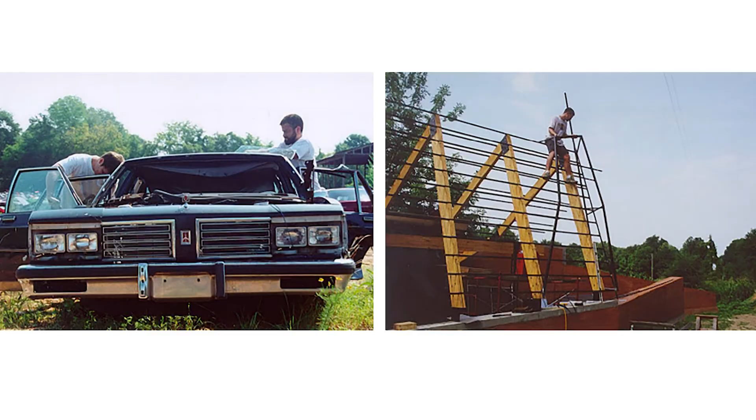So me and a few other students designed this community center for a small community, Mason's Bend in Hale County, Alabama. It was a tight budget. Like most student projects, all of our labor was free, but the materials had to be donated or sourced in a resourceful way.

We used rammed earth, the cypress beams there - we actually cut the trees down and milled them ourselves. The steel was donated, and most notably, we pulled the side windows out of late 80s sedans because they had the perfect holes for flipping them over and attaching to the steel.

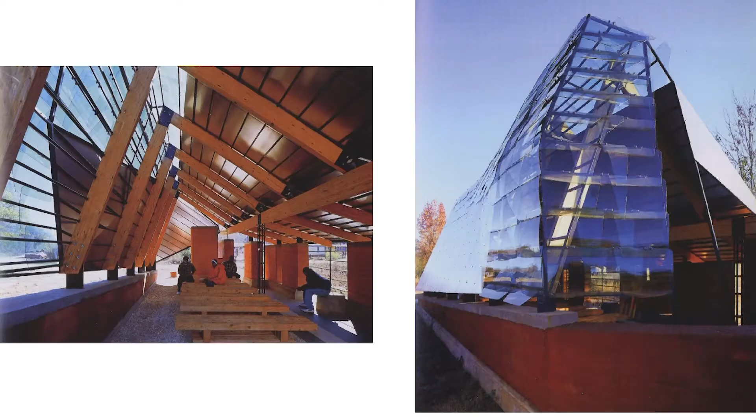What resulted was a community center that could fit 150 people, but was also just a comfortable place to hang out with your friends and grab a smoke, or just get in out of the rain, or whatever.

This time at the Rural Studio reinforced in me that I think through my ideas better in physical space. So whether I'm sketching or building a study model or creating a full-scale mock-up of some idea we've come up with, I tend to think through my hands.

So we've always kept a space for making. Early on, when we were living here, that was a couple sawhorses and some secondhand tools from the flea market. Now it's roughly a 2,000 square foot shop with a full woodworking area, a full steel area, and now I'm sharing shop space with a blacksmith, so we even have a forge and a few other things to play around with. We're constantly working through our ideas like this.

While we both embrace the maker's ethic of creation, we use our differences to hone these ideas that become solutions. For us, iteration and debate of a design problem from different sides allows us to explore new ideas and notions that we might not have arrived at otherwise.

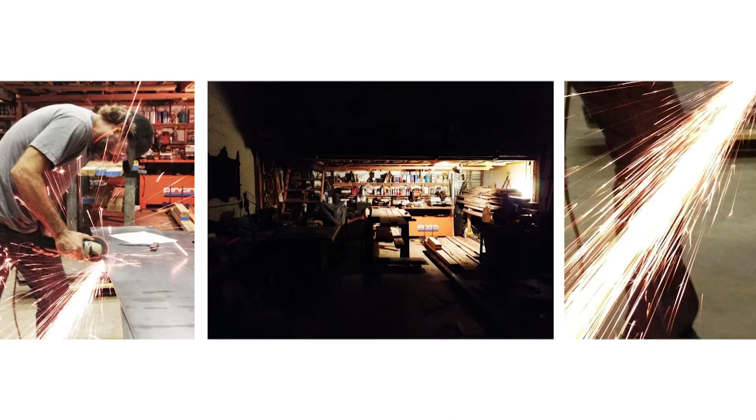Dale is the practical craftsman, finding beauty in the simple functionalism of the idea. And I tend to approach the design process as more of an abstract emotional thinker, looking for the aesthetic solution.

For me, over the years of sewing, I've found that there are many similarities between architecture and sewing, and I think these habits we've established as part of our practice apply in this context as well. My body is the site, and I work through constraints of materials and craft. In each case, the context is unique and site-specific. In this case, it was a problem to solve about using a minimal amount of fabric and seams to create a space for one.

While our approach and even our tools differ, the function and goals behind the tools we use are the same.

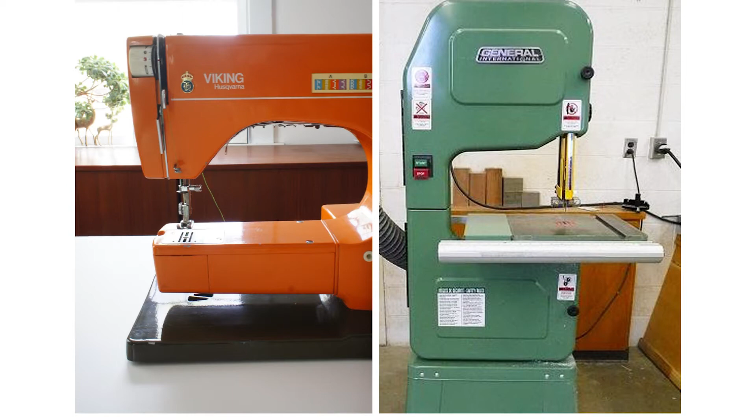Every project is an opportunity to create something meaningful. Regardless of scale, whether it's a sewing project or a sculpture or jewelry, we try to apply the same habits to the project at all levels.

Early on, we were working for other people, and we had all these pent-up creative ideas that we wanted an outlet for. Every birthday present for a friend, or a Christmas present, or a need for a coffee table or a shelf became an opportunity for us to design something. And every design opportunity became an opportunity to make something.

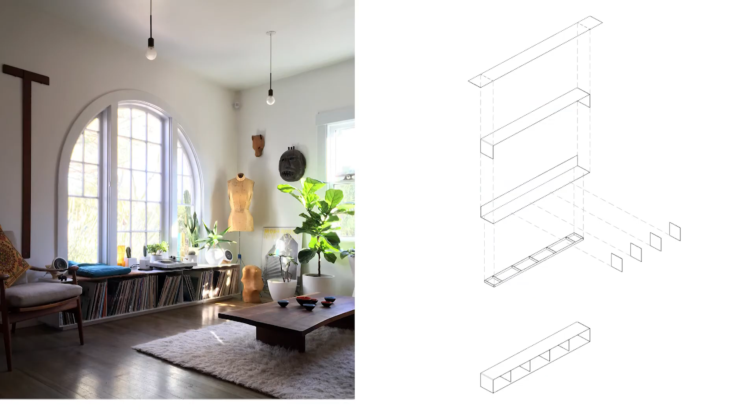That powder coating endeavor turned into another opportunity for our home, where we wanted a powder coated steel record shelf, and also wanted to incorporate a dog perch for our dog. We used bent plate for the top, and plate steel dividers to help organize the contents. This was also a study of efficiency, since we were able to fabricate all the parts out of a single 5x10 sheet.

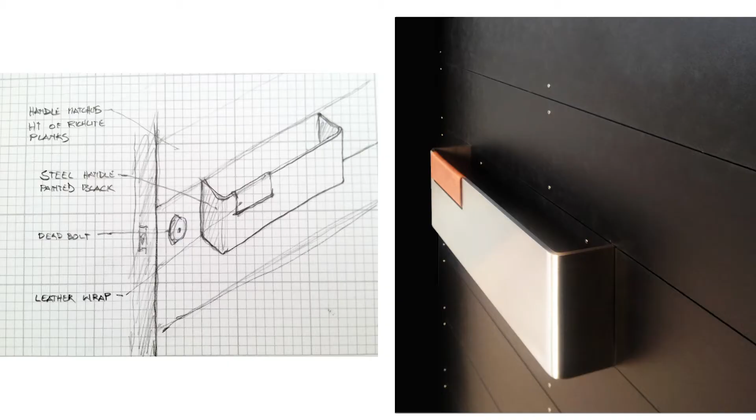The bent plate led to other ideas, like this handle - simple bent stainless steel wrapped in leather right where you grasp it, just to offer a little comfort as you grab the hard steel.

The land was an art site that would host exhibits by other land-based artists, but all the exhibits were temporary, and they wanted one permanent place for this. That meant we had to build it without making scars upon the land, so we used the cattle tracks. We would have wheelbarrows with all our tools, and follow the cattle track up the hill instead of making our own trail - using the scars that were already there for moving materials.

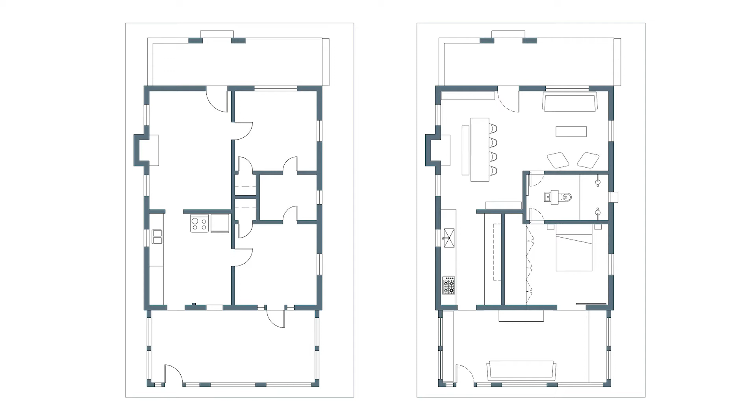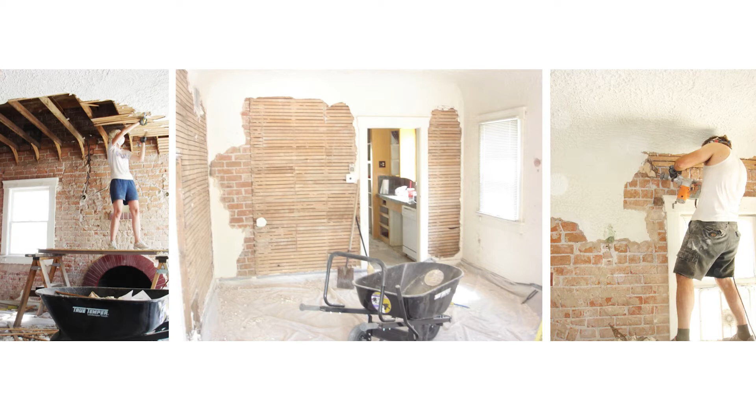And this was us. In 2 weeks, we demoed and just ripped it all apart. And then it took us 4 or 5 years to put it all back together.

I mean, because again, we were still working for other firms at the time, so this was sort of a weekend and evening project. And it was also a really huge learning experience for me because I'd never been through this process before. I think it's one thing to go to site visits and see what's happening. It's another experience when it's your own house and you really just gutted it.

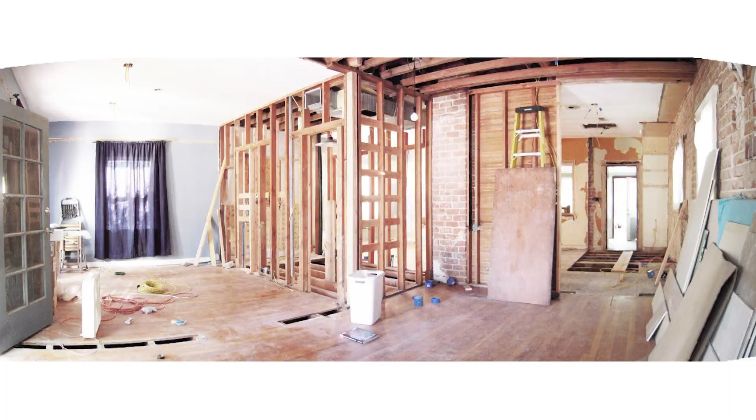But one thing we noticed was that when we started opening up the walls and the ceilings to replace all the electrical, we were really drawn to the beauty of the lath that was on the walls. And we were amassing these huge piles of it, and we started wondering if there was a way that we could reuse it. We felt ashamed to throw away so much beautiful wood, so it ends up being reused.

So here you can see this is just another in-process photo. Over here on the left is looking at what used to be one of the front bedrooms. Sort of in the middle of the space is the bathroom shell, and then looking down through the kitchen into the old addition.

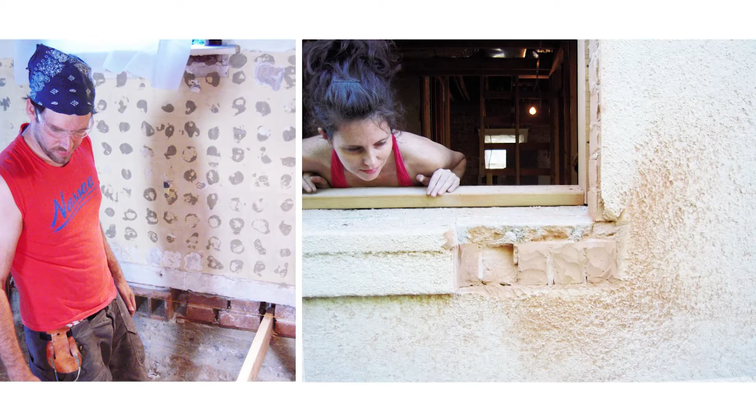I don't know what to say here. I didn't want this in here. Dale doesn't like that this slides in here, but these are just photos of us working, and I think that there were many moments during this process where we really felt kind of overwhelmed. I always joke that what we were actually doing here was sort of these moments of silence, wondering what we had gotten ourselves into.

But, you know, as Dale said, the house came apart really fast, and it was just putting it back together that really took a long time for us. But part of that was also because we would iterate ideas, and we were experimenting on our own home in a lot of ways.

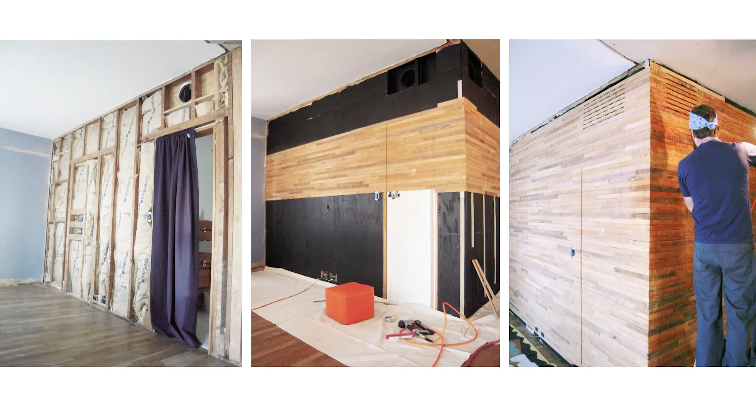Sometimes by reusing materials, but then also we changed out all the windows - they were single pane glass, and we put insulated glass in all the existing sashes, which means everything got heavier and you needed to increase the weight, but the weights wouldn't fit within the window weight area in the sashes or in the frames. So we ended up having to cast our own weights with lead because it's heavier and takes up less space.

So we were smelting lead in a cast iron skillet on a turkey fryer outside, pouring it into a form we had made with some steel pipe, with barely any safety gear probably. But those were the fun moments.

So as you can see here, this is the process of us reusing the lath. What we decided to do is clad the bathroom volume with the lath. We were also testing ideas about how to integrate a door into the lath, coursing it out as it moved across the door, and up in the top corner we routed out small slots for the supply. This is the HVAC supply, and when we brought the lath up, we just cut little slots, and that became an integrated grill.

And here it is today.

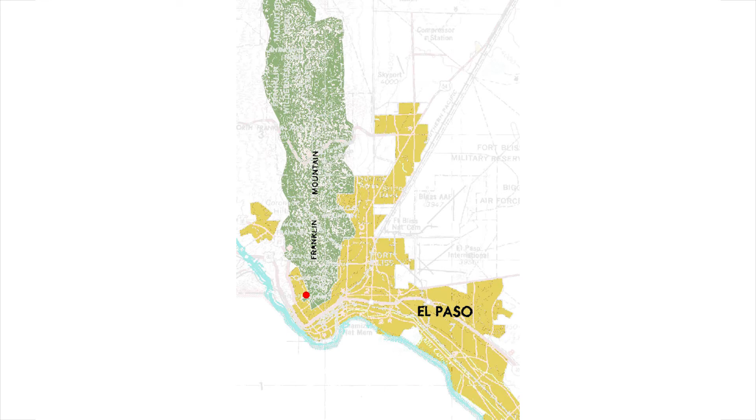So Jeremy and Heather had this site here, the red dot is, perched right at that border between the urban city and the Franklin Mountains. They had a site right at the top of this development, new development that was happening. They had the top site, and this is all state park land to the south and to the east. So there was always going to be protected views to the south in the city and views up to the peaks of the mountain.

The site was steep, probably about a 25% slope, populated with lechuguilla, ocotillo, and these beautiful weathered gray stones.

So we decided to push ourselves as far to the south as we can in order to push away from the northern neighbors and maybe offer a bit of privacy, but also to push right up against this canyon edge would sort of make it feel like you're right on the precipice before falling down in.

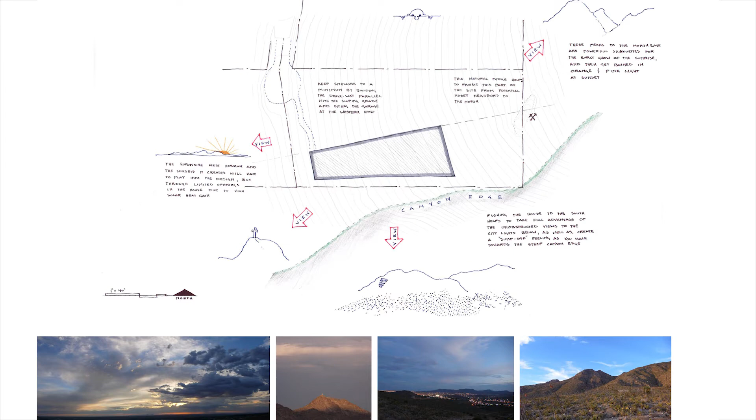Kind of at an oblique angle is Mount Cristo Rey. It became an important thing. So the sunrise comes up and over the Franklin Mountains, and Mount Cristo Rey is the first thing to get kissed by the sun. And someone put the little cross up there. So capturing that view from some moment in the house was important to Jeremy because he wanted to sit down, have his coffee, and just start his day that way every morning.

Oh, sorry, this is still me. I just want to make sure. I'm realizing that my phone might be going.

Sorry. So this is the site. You can see the contours are super tight, 25% grade. The cul-de-sac was already there.

We decided to come in as low as we can to try to minimize our impact on the land, similar to the deck project that we started with. So you come in with your car, pull into the garage mass down low. The living mass would be a story up above that and would open out onto the southern edge.

You can kind of see the fold in the contours here, that was the beginnings of that canyon wall. And then as you come up to the bedroom mass, it's kind of a floating box, and the bedrooms would be here with the master opening up into this terraced garden.

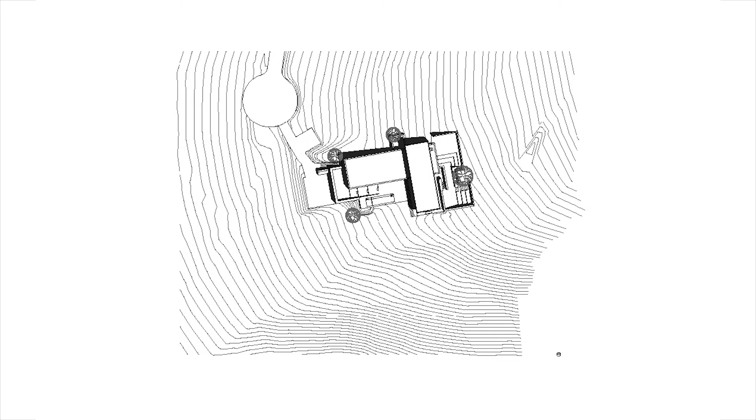And the site was so steep coming down here that we wanted to slow that flow of water that's going to be screaming down the hill, but also create a moment of a manicured garden to juxtapose against the wild nature of the slope.

So we'll just walk through this kind of quick. The owners would come in here to the garage, then they would come into the mudroom, ascend a set of stairs that would bring them into the backside of the kitchen, and this became like a pantry area. And then the kitchen and the dining room open up onto the pool patio, and as you walk back into the family room, you end up below grade.

One of the things we haven't touched on is that the northern side is where your neighbors were going to be. Usually we want to try to capture as much northern light as we can, but we also wanted to maintain some privacy. So the only opening on the northern side is this huge window from the office space, but it's protected because there's this courtyard. It's actually sort of below grade, so there's this courtyard that opens up off of the office. It allows light to come in without imposing on the privacy area.

And then you ascend the stairs, and you are in the bedroom wing with the kids' bedrooms down at one end and the master bedroom here opening up onto the terraces.

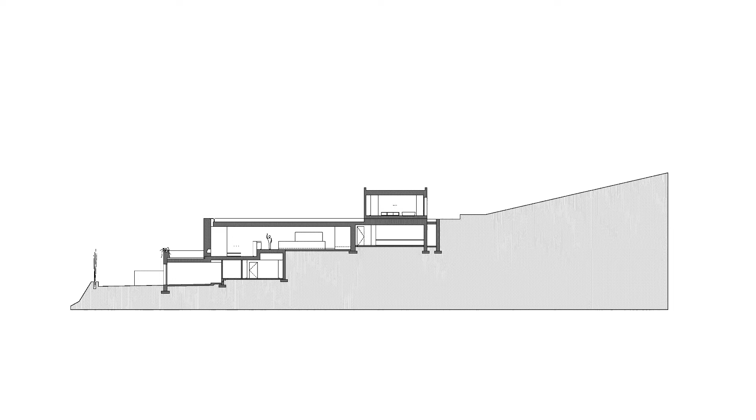Here I was going to say, here's just the site section sort of reiterating what Dale was walking through in the plan. So basically, I think the most important thing for us was, as we cut this section, that every level of the home had a connection to grade.

And you can see how the slope of the site really dictated the massing and how you had to approach it. The only other strategy would be, and this is what actually gets implemented in El Paso a lot, is you bulldoze and build giant retaining walls in order to build a flat building site. Instead, we tried to create something that would step down the hill and use the site to its advantage.

And I think conceptually, one of the things that was important to us was this idea that the daily living space of the living and kitchen was really anchored and grounded. And that was reflected in the materiality, in that we used stone for the main mass. And then the upper cantilevered box was a white stucco that was referencing an abandoned quartz mine that was just off the property.

As we mentioned, the idea about the stone walls for our mass, that was one of the things that we were noticing when we were in El Paso, is that these stone walls are ubiquitous. They're everywhere. They're in all colors, all sizes, all shapes, and all scales and textures. And so for us, that became a driving concept, and how could we use this very typical material and the local crafts in a new way.

So what we ended up doing was we found a local quarry that could source a gray stone that sort of referenced the gray stone that we found on the site. And because the living mass is this gray stone, it sort of disappears from a distance into the site, and what you see is kind of this floating white box hovering above the landscape.

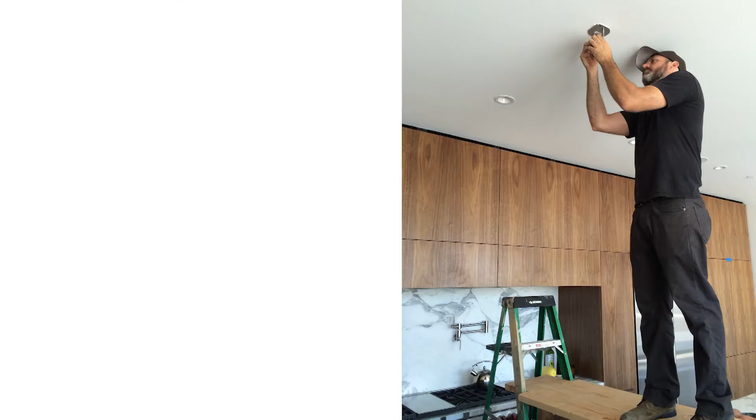Dale working on installing the lights.

I think another thing that was really important to the project was this idea of scalar concepts. We had the big overarching ideas of the concept, and we also had the small ones. In this case, we fabricated these steel boxes to embed the outlet switches and hose bibs into the steel in an intentional manner. While working through the electrical plan, we came upon this sort of problem.

How are you going to put a light switch on a rough, bumpy stone wall? There was something about that that just didn't sit right with us. So this is when we came up with the idea to dig out a little bit of the stone so that these steel recesses could be displayed.

We would actually mount the box first, and it was easier for the craftsmen to deal with too. They actually enjoyed this a lot better than having to run conduit or wires and try to fit something within a stone wall. They could mount the box, run all their conduit, Romex, put the box in place, and then stone right up to it, and it was a much faster process.

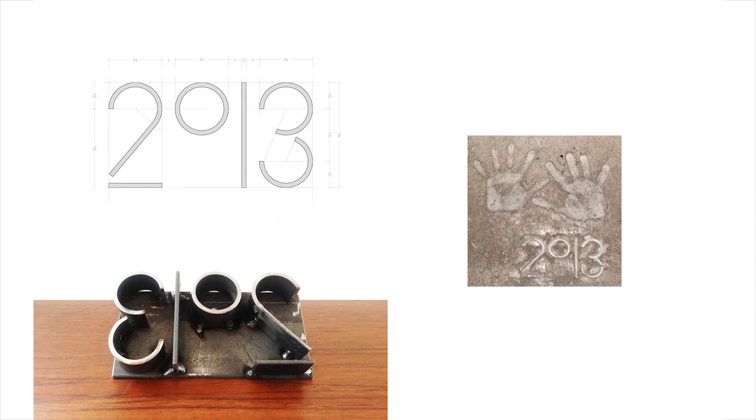And then one of the last moments: while we were pouring the concrete, we wanted to get the family to stamp their hands in it. At the top of the stairs in the pantry, which was more of the family space, everyone put their hands in the wet concrete.

And then we wanted to mark it with a little date stamp, but it was almost a last minute idea. Right before a trip, we threw this together with some scrap pipe and bar and brought it out there. They've actually held onto this—it becomes a cherished object that will always remind them of the cherished moment of all of them stamping their hands in the concrete.

So we ended up finding a space centrally located in Tucson. It's at the Mercado, a great place where everybody loves to hang out because it's sort of a courtyard space, and there's food and other activities you can do there.

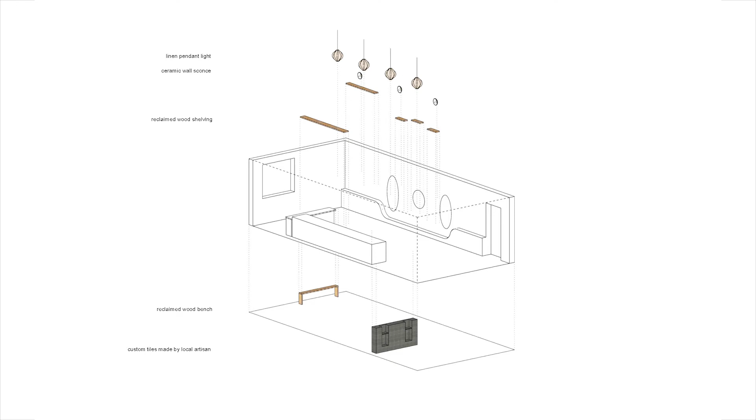We sourced reclaimed old wood from our local green supply store. One of our local tile makers offered her time and services to make custom tiles for us. And this was another marriage of Dale and I's skills, in that we came up with these thin steel rods, and then I constructed the lampshade for some hanging lights.

We also collaborated with our good friend Julia. She has a small company called Stone Werewolf, and she helped us with a wall light. We asked her to make a small white vessel and keep the rough quality and the haptic made feel to it, but we weren't really looking for anything super precise and perfect.

I think speaking to the concept of Anna Jo using her hands to express her art, we wanted everything to feel like it was obviously handmade. So she hand built these vessels, and Connor turned the wood in our shop for this wood clamping component.

So these are the parts. You can see the texture in the white vessel where Julia's fingerprints are actually in there, and that again becomes a texture that gets broadcast when you shine a light on it. All the other components are off the shelf except for the turned pieces by Connor. And this is just a quick axon showing how everything comes together.

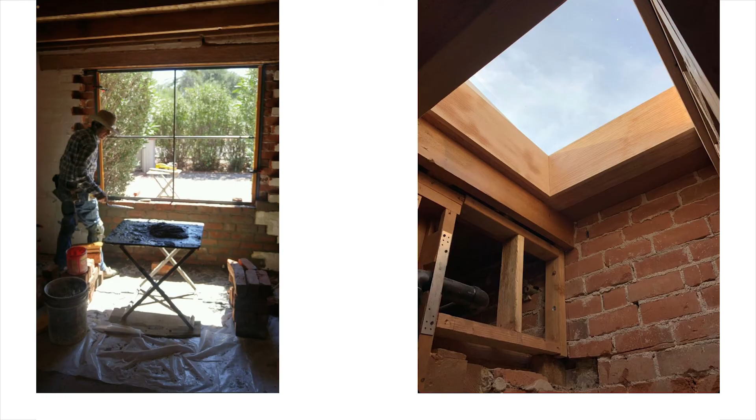This is another in-process shot of the master bathroom where we added another large skylight. You can see where we sandblasted the beams, stripped the paint back to expose the structure.

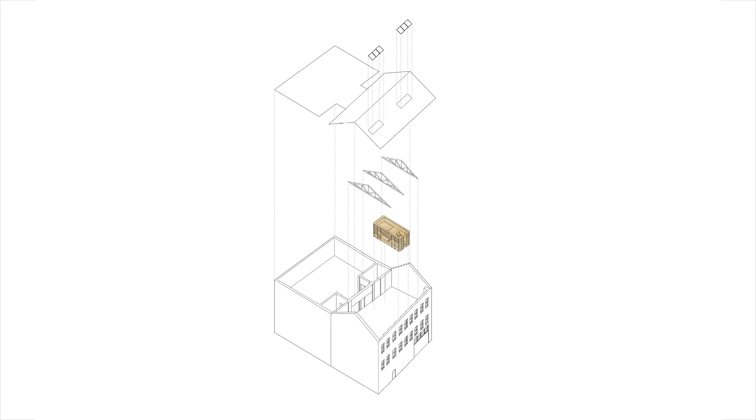Our idea was to basically leave the space alone, don't add a whole lot to what's there, just clean it up, clean up the floors, and then add this one furniture element floating in the middle of the space that we're calling the book bed. So it's one object. You can imagine it'll be just covered with books.

And then we integrated all of these different functions within it. The kitchen kind of pushes into this niche that we've created. And then on the other side, we have this hidden door that's like one of those secret passageway doors, and that gets you in to the closet and the bathroom here.

And then there's a series of steps that take you up onto the top, which is the sleeping loft. It'll all sort of fit within this one furniture element. This is what we feel like it's going to look like in the space, probably with a lot more books than what we've figured here.

We're adding a few additive things to the structure: two skylights. Here there's a skylight over the sleeping area, and then because he's probably going to use it as an art loft as well, there's going to be a skylight over where he thinks he'll be doing his artwork.

Okay, and this is our last project that we wanted to share with you tonight. We kept it last because we thought it was fitting because we sort of started in New Mexico and now we're ending in New Mexico. This is a small residential house for a young couple.

They have a lot in El Prado on the Mesa, just west of Taos. It's got huge views of the horizon, and expansive views to the mountains and to the east, and then behind you to the west, you can get some views of the gorge. Yeah, you can kind of see it.

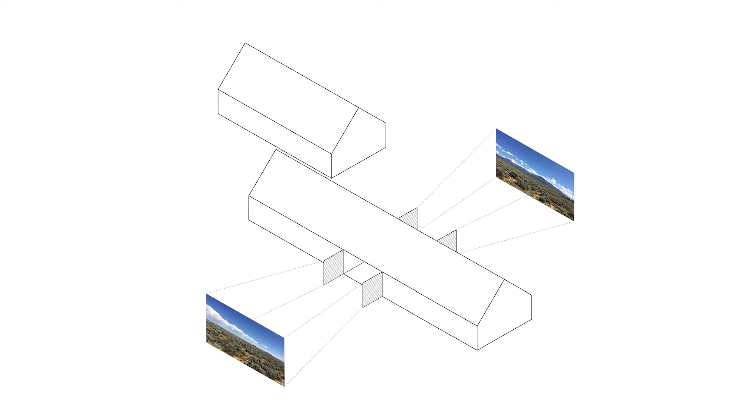It's a simple form, just a gable extruded along the length of it, but the way we're carving space here and there creates complexity in how you inhabit it and bring light down into it. So this is how it will sit in the landscape with the mountains to the back.

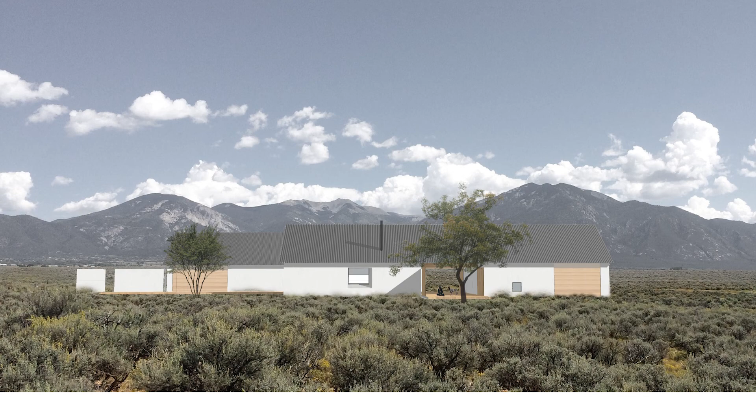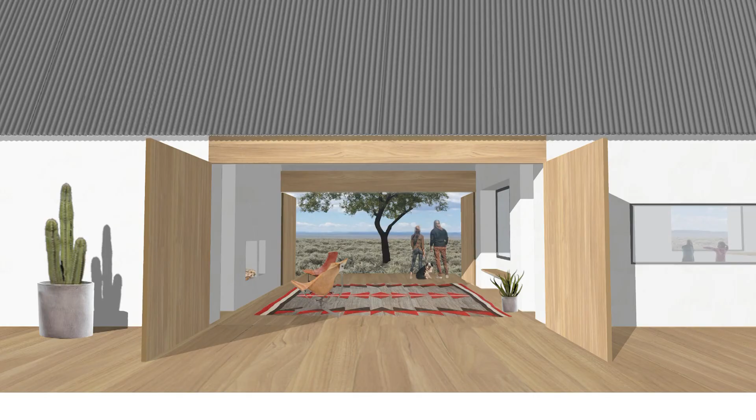Little shot. So in her art studio, we have this big window, funneling light in, and then the loft on the other side is going to have a window seat that lets you perch out above and outside of the house. Through the dog trot. That's it.

So we're open to questions if anyone has anything they want to say. I see someone in the back there.

You didn't mention the budgets on any of these projects. We did when they were cheap.

So the salon was $20,000. Our budget for our house was $40,000, what we worked with. The Taos house actually has a fairly tight budget, around $500,000 to $600,000, so that's been a bit of a challenge for us.

One thing we didn't realize since leaving New Mexico is how expensive it is to build in Taos, New Mexico. The contractors pretty much treat it like it's an island. That's what they said - the cost to get goods there and have work produced there is very high.

The project we did in El Paso was roughly $325 a square foot for a really amazing space. What we're looking at in Taos is like $350 a square foot for frame and stucco and a simple metal roof, so it's kind of comparable. But the largest budget was the Franklin Mountain House in El Paso - that was like $1.5 million.